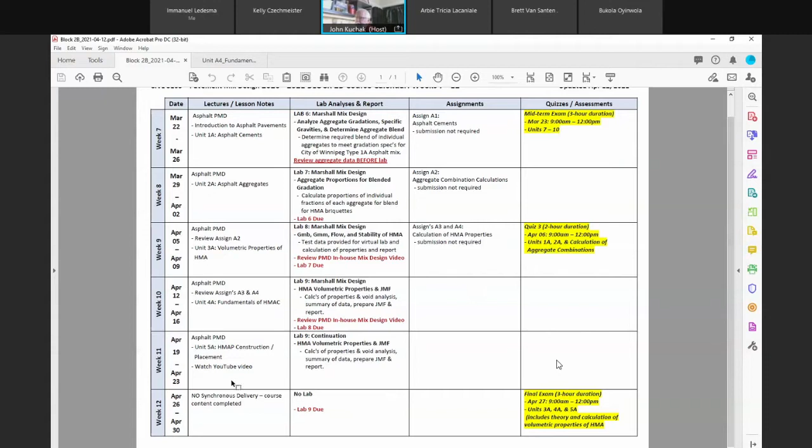In other words, what did we determine? I updated this. We're looking at units 3A, 4A, and 5A. There's also going to be calculations of volumetric properties of HMA. You'll have problems to calculate GSE, maybe GMB, GSB, percent asphalt absorbed, total. Those questions you see on the assignments are typical things. This is the latest version. I don't think I'll have to update it anymore, but if there are any changes, I'll let you know. That's coming up. Any questions on the block schedule?

Yeah, that's right, Pavel, sorry, just saw your message here. Yeah, you either multiply by 4 or divide by a quarter.

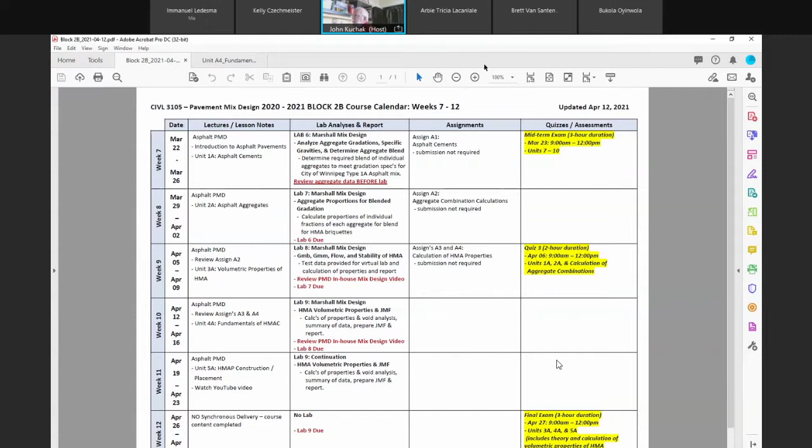Let me go to the next one here: fundamentals of hot mix. If you compare what we've been looking at, asphalt compared to Portland cement concrete, it's quite a bit different. I've always had a love for Portland cement concrete. Asphalt, I find it's okay, I don't mind it, but it's very temperamental, very sensitive to fluctuations and changes. We'll note that in the lab when we look at some of the properties we're going to be calculating, and specific gravities come into play. They have a big bearing on the outcome, your VMAs and your air voids. Asphalt is used worldwide, it's been around many, many years, and successfully too, but it's probably a little bit more finicky. Now when you're talking asphalts with recycled materials or polymer additives, it can get pretty hairy.

Okay, some of the key issues here we looked at: we know that it consists essentially of aggregates and asphalt cement.

Mix them together. Just like Portland cement concrete, the water gets absorbed by the aggregates. These aggregates in a hot mix are going to absorb some of the AC, asphalt cement. I use the acronym AC quite a bit, and you'll notice that even in the notes.

If we look at this mix here, you've got crushed aggregate, you've got the VMA with some AC, and if you look closer, you can see some small air voids, and that's what you want. This mix is going to be resistant to movement because it's sharp, it's angular, you've got your internal friction.

The rough texture gives good adhesion between the AC and the aggregate surfaces, so you should have high stability. Shouldn't have a problem with stability. Even with our mixes here in the city of Winnipeg, all the years I've been involved with it, stability has never really been an issue. There are other factors that come into play, like air voids and rutting and so forth.

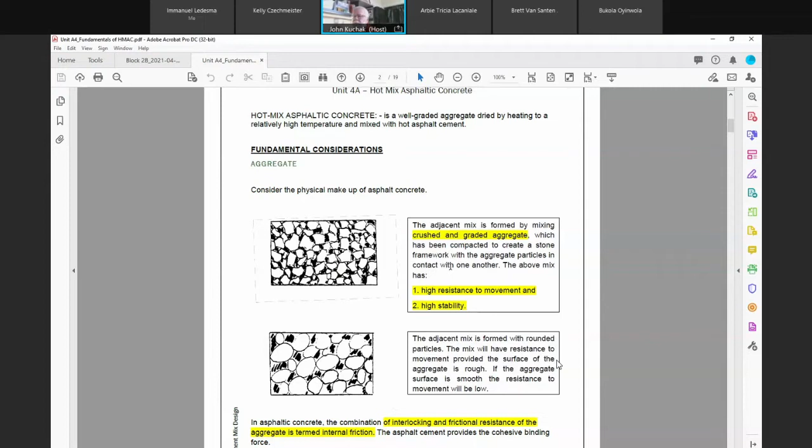If you look at the mix below it, it's a rough sketch, but it shows these aggregates are round. They're not sharp, angular ones. This is a smooth texture, and it may not adhere to the surface as well as it would in the upper sketch. The adjacent mix is formed of rounded particles, and they're going to move around.

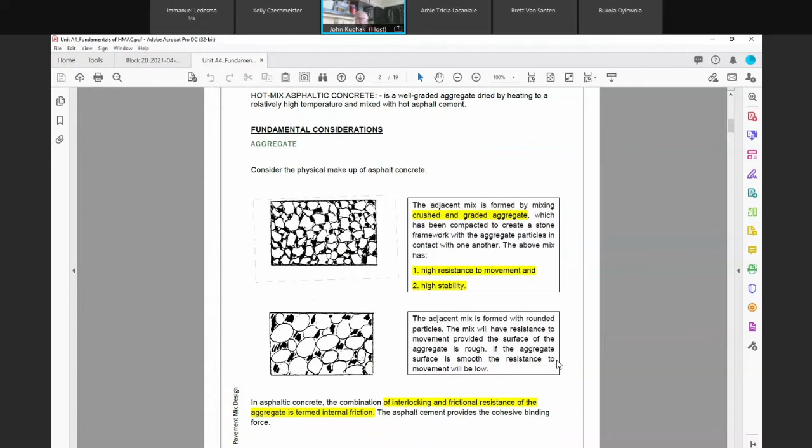The combination of interlocking and frictional resistance of the aggregate is termed internal friction. That's when we look at the mix and say, okay, what's internal friction like? We know that is key to the performance of the pavement, the hot mix.

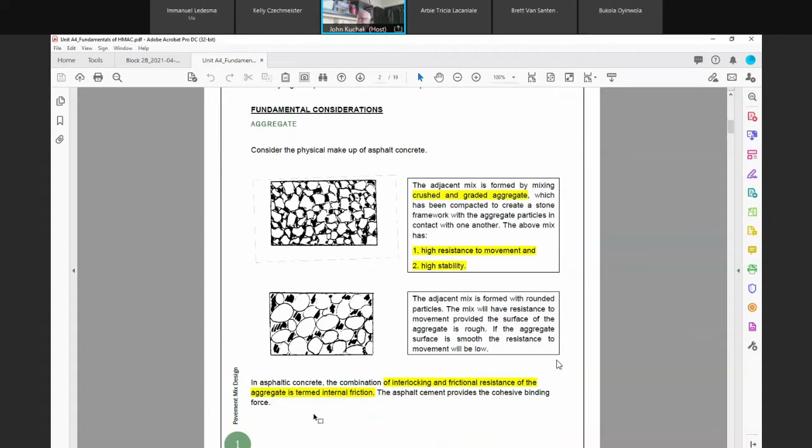We looked at this in your aggregates section, and this was part of your quiz, which I'm in the midst of trying to get finished off, marking.

In order of greatest stability: crushed particles, rough surface, that's your best. May not always be ideal, may not always be available. So rounded particles, rough surface - you're getting that adhesion, that film of AC is coating the aggregates. At least the rough texture is giving you some adherence.

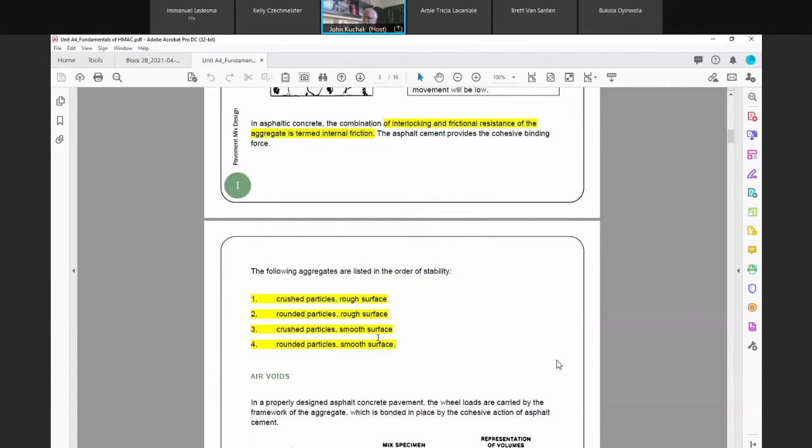Crushed particles, smooth surface - you may get the interlock somewhat, but now you're not going to get that adhesion of the film of AC to your aggregates, so you're not going to get that internal friction. And then the worst, obviously, would be rounded particles, smooth surface.

We looked at this earlier on, I just want to bring it up again. Aggregates, voids, VMA - voids in mineral aggregate. Add some AC to it, and you're going to get air voids. You're going to get asphalt. This is total, and then you've got your aggregate. Keep in mind that some of this asphalt, if you look at our sketch, goes into the aggregate, and that's the absorbed portion.

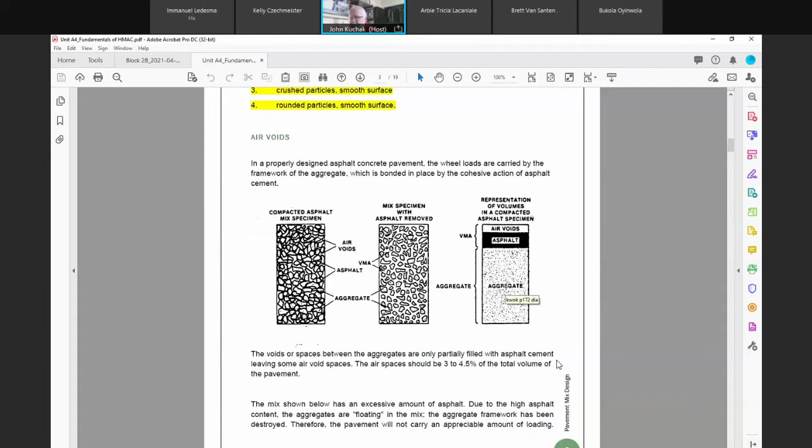We're shooting for air voids, essentially 3 to 5%. It doesn't mean you're going to get 3 to 5% in the field. When you first make a mix and you put it in the field and pave it, you're probably around 8% air voids in situ. With time and traffic and further compaction, you're going to consolidate. It's been proven that from a design point of view, between 3 and 5, you will have the air voids that are required in the field.

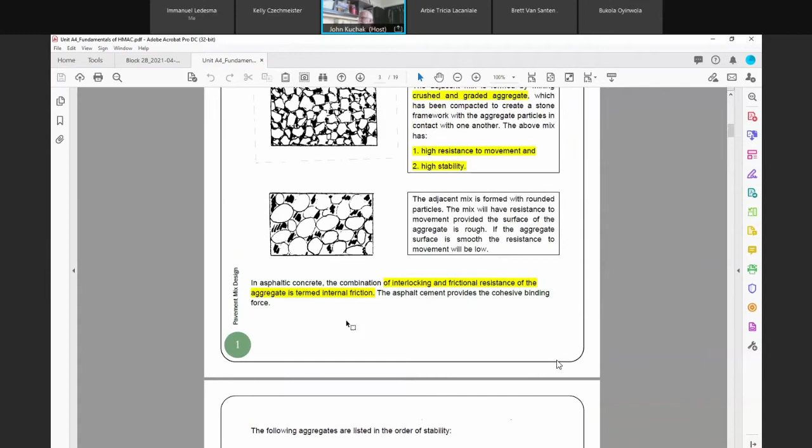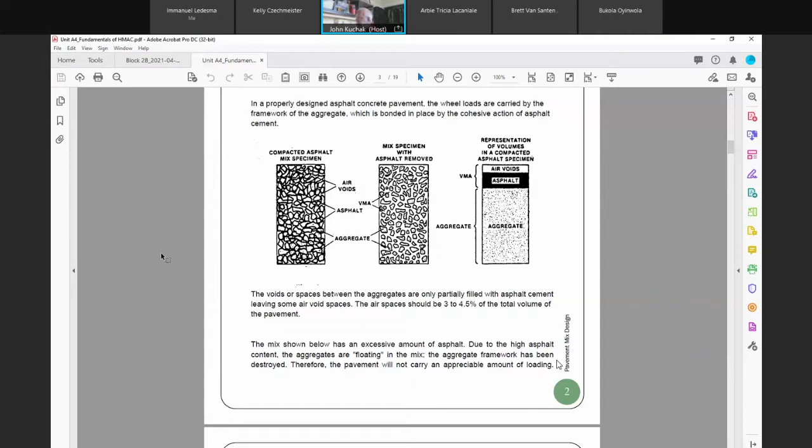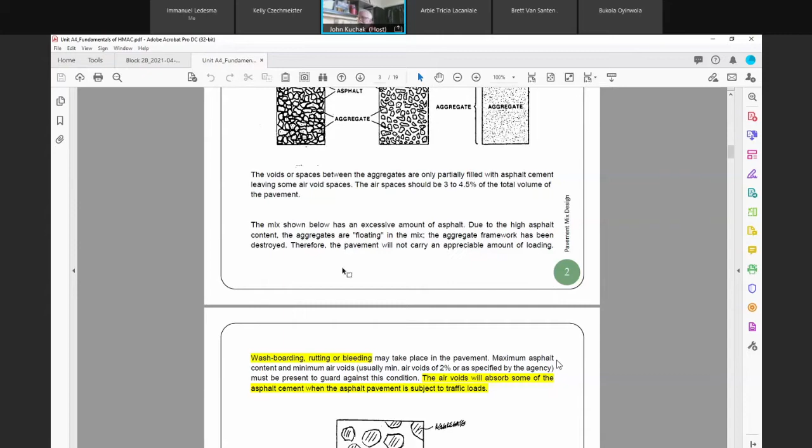So if we look at a couple of mixes, what can happen? Looking at this rough sketch, the mix shown below has an excessive amount of asphalt. Due to the high AC content, the aggregates are floating in the mix, and the aggregate framework has been destroyed. In other words, if you add too much AC, it's going to push those particles apart.

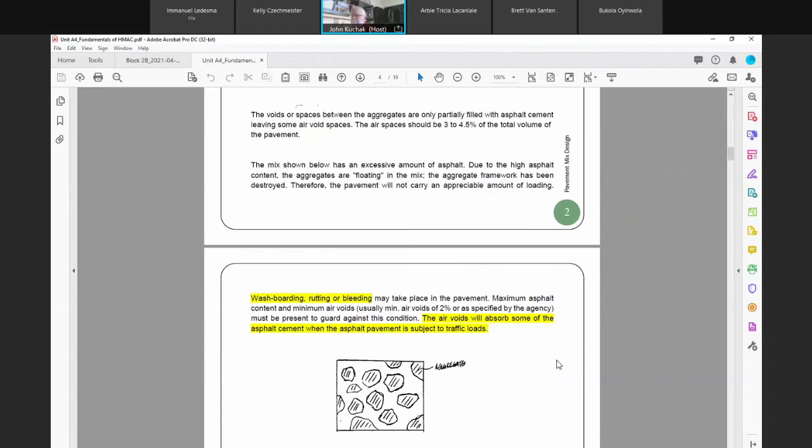It's almost similar to Proctor testing. You did standard Proctor last year with Natalie. If you add water past the optimum, it starts to decrease the density because it's pushing the particles away, whereas when you're first reaching the optimum, it's helping to lubricate and draw the particles together when compacting. AC is the same way, hot mix is the same way. You want to find an optimum AC content that gives you the best mix.

So if you have too much, you'll have bleeding. You may have seen that - sometimes when you drive down the highway, you look ahead and see kind of a glossy patch coming up. That's excessive amounts of AC, or a loss of air voids where the AC bled. Washboarding, rutting, or bleeding may take place in the pavement.

Maximum AC and minimum air voids of 2%, and you got to have a minimum. Many times, some of you that may work with MI or other contractors, if you got a 2-lift or 3-lift construction and your air voids, your VMAs are borderline, you can put them in the bottom mat, because you're going to have another mat on top of it, another mat on top of it.

Typically here we basically have 2 lifts, but I've been on a project where we had 4 lifts. If you're using sand asphalt, you need a thicker layer. The highway between Winkler and Morden, that was almost an essential sand mix, and that was about 180 to 200 millimeters thick pavement, asphaltic.

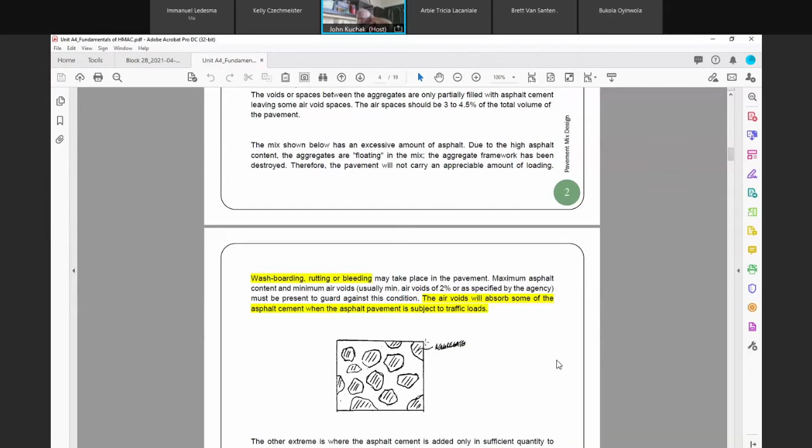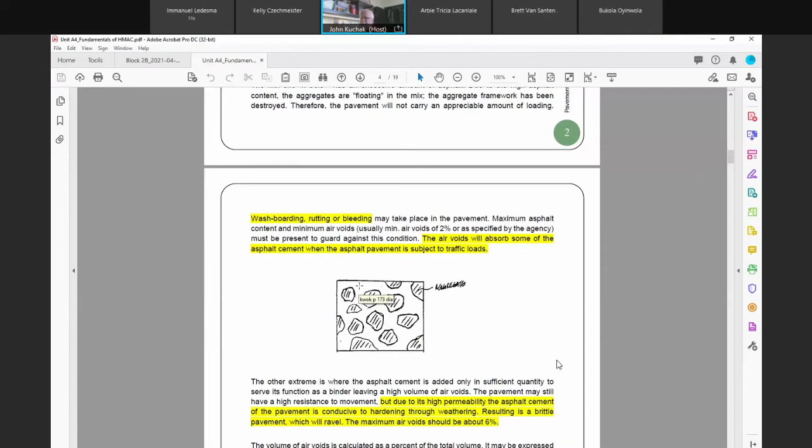So again, you can just see it's key - too much is no good, not enough is no good. The air voids will absorb some of the asphalt cement when the asphalt pavement is subject to traffic loads. That's why we want the air voids - you gotta have the movement. It's flexible, so as you're loading those pavements, the air voids allow movement to a certain degree. That's why we have to be careful on those air voids.

The other extreme is where the asphalt cement is added only in sufficient quantity to serve as a binder, and that means you got excessive air voids - you don't have enough AC. The voids in mineral aggregates are there based on the aggregates, and if you don't have enough AC, some of it's going to get absorbed. The effective AC now isn't enough, so now you got extreme volume of air voids - high permeability, conducive to hardening through weathering, oxidation. Brittle pavement mix, there's no flexibility - it's too stiff, it's brittle.

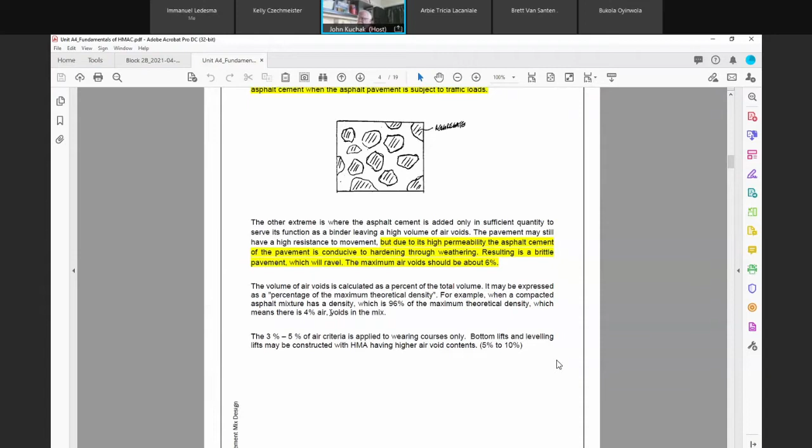So the maximum should be about 6%. The volume of air void is calculated as a percent of the total volume. It may be expressed as a percentage of the maximum theoretical density.

So that 3 to 5% criteria is what's been proven in the industry to work. That's where we have to be if we're going to have a successful mix. The density you do after compaction - those of you that maybe have done density testing, whether on granular base using nuclear densometers, or even on the pavement - typically you're going to do a percent compaction, and you may do compaction based on the GMM, the maximum theoretical specific gravity, which usually isn't done here.

It's usually based on the Marshall density. Just like a Proctor - you do a Proctor on the A base, you test the density in the field, and the density in the field is what percent of the standard Proctor. Same thing here: you compact a hot mix, you do densities on it, either by the nuclear gauge or you take cores, and then you determine what is it based on the stability of that mix.

In other words, you take an asphalt sample, you run stabilities - you hollowed out the briquettes, you do your bulk specific gravities, you run stabilities, you run flow. Now, everything in the field that was compacted is at what percent of that Marshall density?

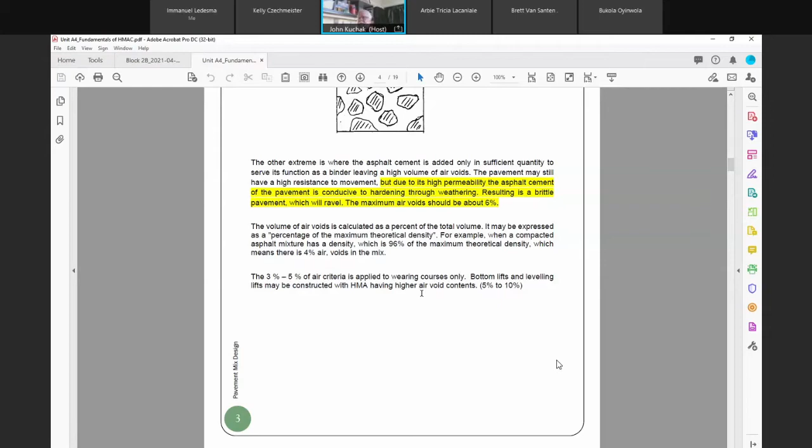Different agencies use different criteria - I believe AMI calls for 97 or 98% of Marshall density, though it's been a while since I've read that spec. The 3 to 5% air criteria is applied to wearing courses only. So down on the bottom, you can have higher air, but the surface one, where you have a lot of resistance to traffic, that's where you want 3 to 5.

What is VMA? It represents the space available to accommodate the volume of effective AC. Effective, because when you add total asphalt, you lose some of it into the aggregate - it's absorbed. So the remaining is the effective amount. The voids filled with AC is your effective asphalt content. Same thing applies to VBE, the volume of effective bitumen - it's also the voids filled with asphalt. Makes sense, right?

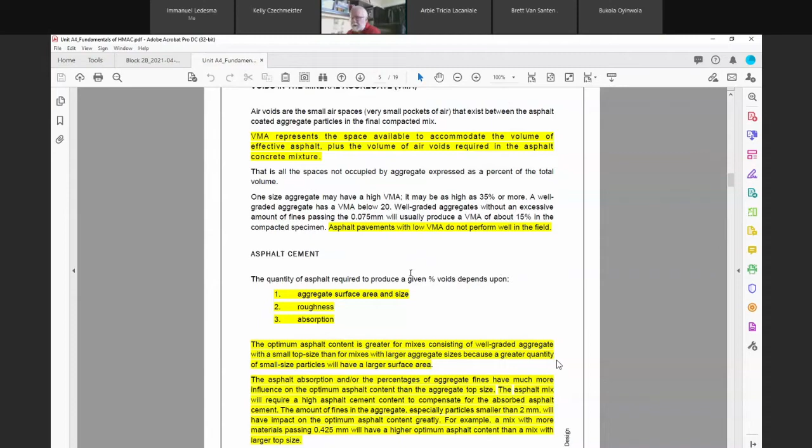Asphalt pavements with low VMA do not perform well in the field. So it's critical - you've got to have that optimum void and mineral aggregate. That's a starting point. Questions so far?

We've been talking voids, voids, voids. What are they dependent on? These three things: the surface area and size of your aggregate, the roughness, and obviously its absorption. If you have high absorptive aggregates and you haven't designed it properly and your AC content is low, you're going to lose a lot of it into the aggregates and you're not going to have your effective AC content.

So it's key - a couple things to remember here. Again, it's based on surface area. Optimum AC content is greater for mixes containing well-graded aggregate with small top size. Maximum size is smaller, meaning your grading is finer. A greater quantity of small size particles will have a larger surface area than larger aggregate - sand has more surface area than gravel and coarse aggregate. That's why in Portland cement concrete, if you have a very sandy mix, you need more water to make it workable, because you need more cement due to the greater surface area.

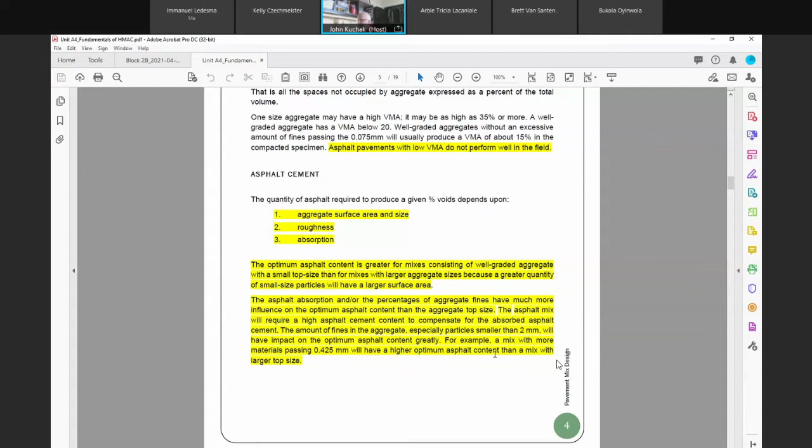The asphalt absorption and/or the percentage of aggregate fines have much more influence on the optimum AC than the aggregate top size. The mix will require a high AC to compensate for the absorbed asphalt cement - due to surface area, greater absorption. The amount of fines in the aggregate, especially smaller than 2 millimeters, will impact your optimum AC content. In other words, a mix with more material passing 425 will have a higher optimum AC than a mix with a larger top size - you just need to reread that a few times to get it straight in your head.

I made it yellow for a reason. There's a lot of information coming up here, and again this comes with experience. I'm going to just highlight some key issues - I don't expect you to know it all. It takes a good understanding of asphalt technology to work with this, but some of it is pretty straightforward.

We've had properties we're trying to achieve: VMAs, air voids, stability. Again, stability is the resistance to movement - how strong is that pavement, how flexible is it? You may have high stabilities.

I believe we need 7,000 newtons, City of Winnipeg. You may be at 10, 11 - is that a good mix? May not be, maybe it's too high, not flexible enough, too brittle possibly. So there's a rhyme or reason why we select certain criteria.

So if you have low stability, what are some of the causes? Well, too much asphalt - that's why we've got to get that optimum. Remember, we're looking for well-graded mixes. Maybe you've got too much sand in there, the medium-sized sand.

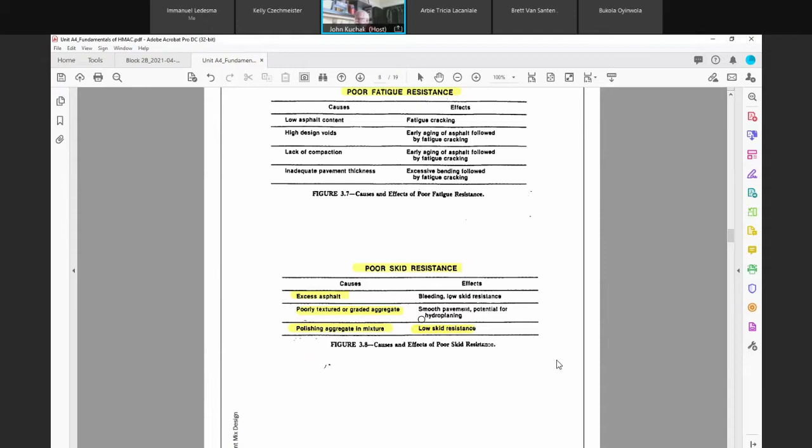And rounded aggregates, they're polished. It's going to give us poor skid resistance. Poorly textured or graded aggregate, polishing aggregate - essentially the same thing. If it's poorly textured, chances are it's polishing. So here, in the mixture, we're going to have low skid resistance. Here, though, on wet conditions, you're prone to hydroplaning. Okay, any questions so far?

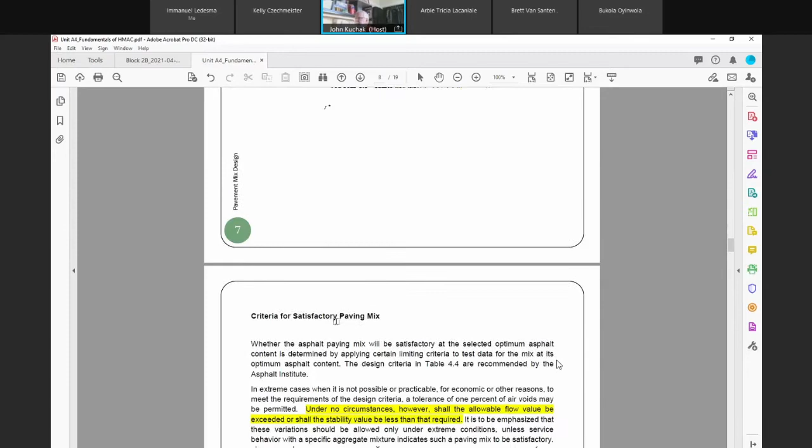I'm going through this fairly quickly since some of this was covered in our aggregates section, but these are criteria for a satisfactory paving mix. Here's some Marshall design criteria taken out of Asphalt Institute, and you'll see this quite a bit in all other agencies.

Look at light traffic - when you're designing a pavement, the thickness is going to be dependent on the magnitude of traffic and the frequency. We covered that in Unit 1 with Portland cement concrete - it's the magnitude of those loads and also the frequency. They refer to that by counting the number of equivalent single axle loads. If we do pavement thickness design, you would cover that.

So you're looking at light traffic, medium traffic, and heavy traffic. City of Winnipeg is in the heavy traffic category because we have arterial roads, residential roads, but we also have roads like Main Street and Portage. The bigger arterial roads will take a lot more heavy truck traffic.

So here we go with 75 blows of compaction. In the video, you drop the hammer, 75 blows on one face, pull out the mold, flip it over, pack 75 on the other side. So we're using a lot more energy, and if we're using more energy, our densities are going to be greater.

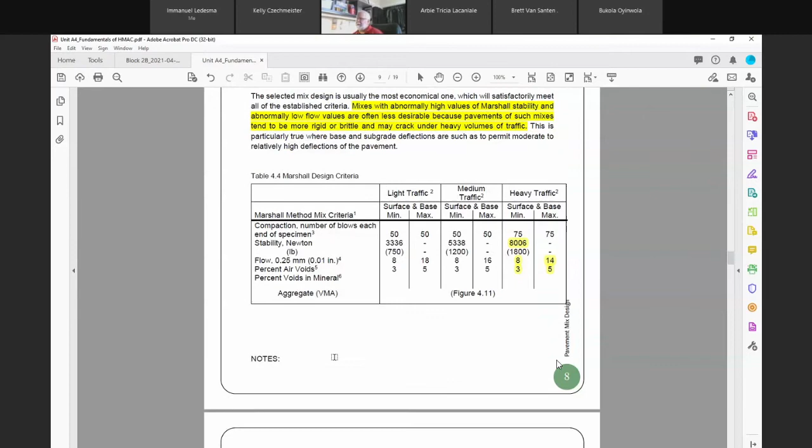So you can see here that our VMA changes somewhat - they just put a footnote for the VMA, which is going to be dependent on your maximum size. If you look at number 6 here, percent voids in mineral aggregate will be calculated on the basis of the bulk specific gravity of the aggregate. So it's a function of the aggregate.

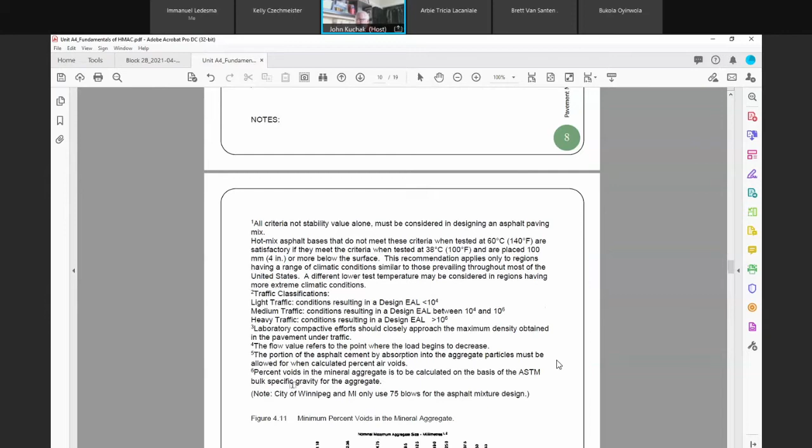But anyhow, you can see there's different criteria based on your traffic loading - light traffic, medium, and you have a range, 75, 75, and so forth, okay?

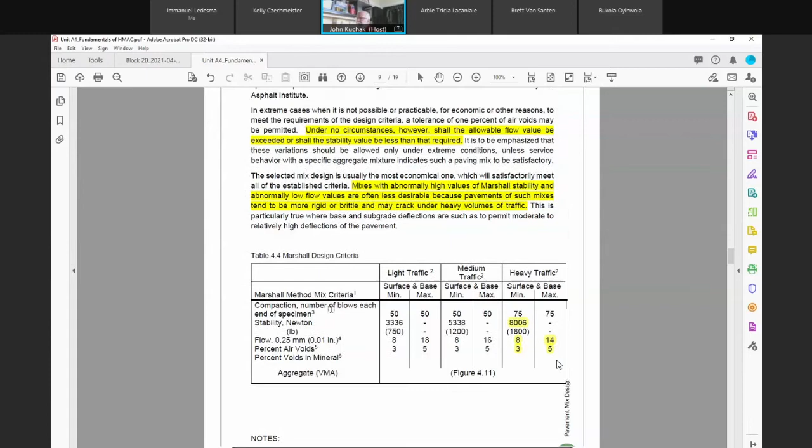Under no circumstances shall the allowable flow value be exceeded, or shall the stability value be less than that required. What they're mentioning here is economics comes into play, and sometimes it may be cheaper. But if you're making a cheaper mix and sacrificing your flow and stability - high flows are not good because you're going to have too much deformation. Low flows are no good because your pavement's too brittle, it's not flexible enough. So you've got to have a happy medium.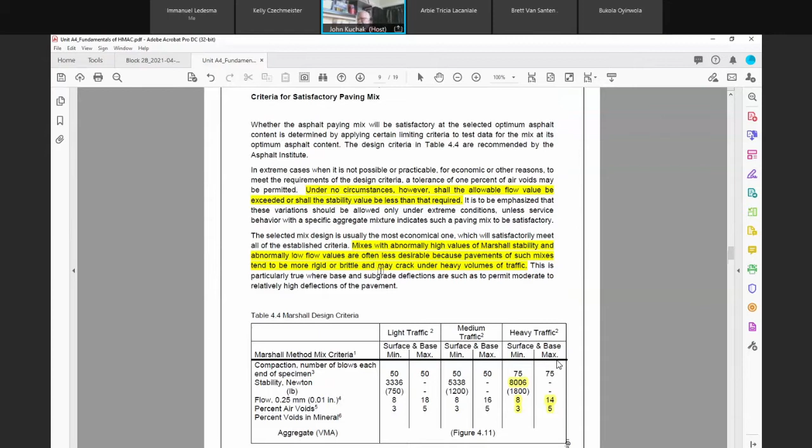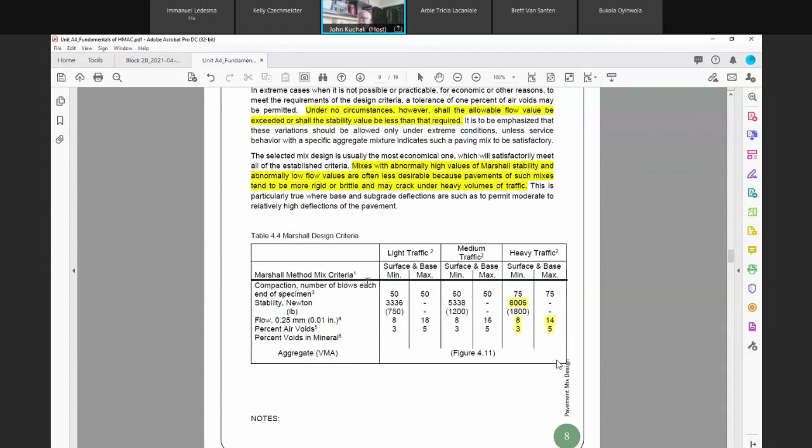Mixes with abnormally high values of Marshall stability and abnormally low flow values are often less desirable because pavements of such mixes tend to be more rigid or brittle and may crack under heavy volumes of traffic. We know if something is very, very brittle, there's no ductility to it - it can't bend. Stress strain - you have a material where your load may be low, but your strain may be high, so there's more flexibility. A weak silt, for example, if you did an unconfined compression strength test, you have low loading but phenomenal strains.

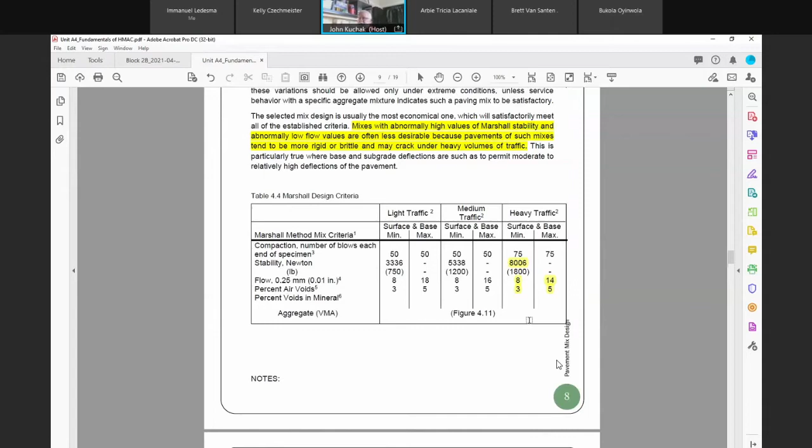So this was taken out of Asphalt Institute, and this just gives you the minimum percent voids in mineral aggregate. But that should have been down in the next one - here's the typical one we're looking at.

Okay, this is essentially what's happening in a hot mix. You've got aggregate, you've got absorbed portion, and this is your effective. In other words, your VMA is from there to there. You've got air voids, here's your voids filled with asphalt, which is your effective. VBE, volume of effective bitumen, is equal to the volume of voids filled with asphalt. Straightforward - we have an effective volume of aggregates, and that's this one here.

That's this one without the aggregate that contains the asphalt - in other words, the voids containing the asphalt. Here's your total AC, it's made up of voids filled with asphalt and what got absorbed. Sorry, what got absorbed here, this way.

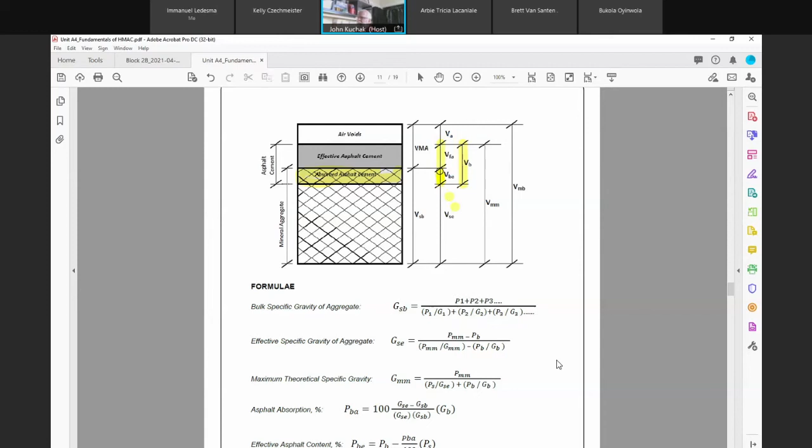Here's your maximum density, specific gravity, VMM - you can see there's no air voids. Add the air voids to it and you get your bulk. Knowing these specific gravities, you can determine volumes. Given a mass, you can determine - we went over that on the volumetric calculation PowerPoint, but I believe it's a PDF copy for you guys. Formulas are given on the bottom here, straightforward.

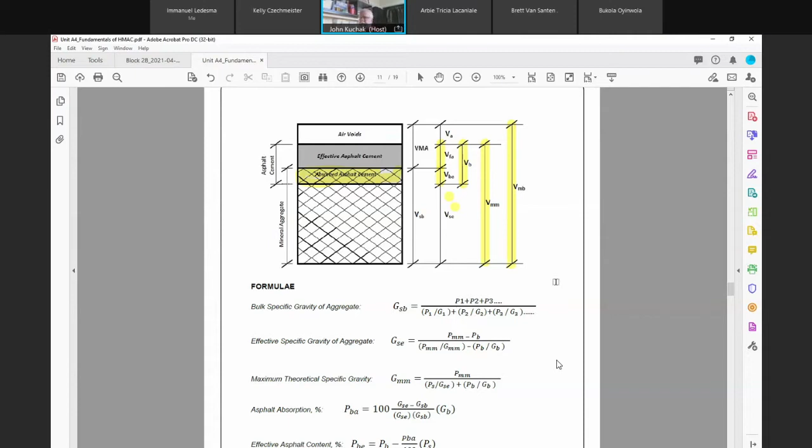Keep in mind, some of you that have done that assignment - there's one problem where you have to calculate GSE, you have to calculate GMM. You're saying, if I look at my formula here for effective specific gravity, I have to know my GMM. So you say, well, I'm going to calculate my GMM, but I've got to know my GSE. Now what do I do? Look at all the other formulas - it'll come.

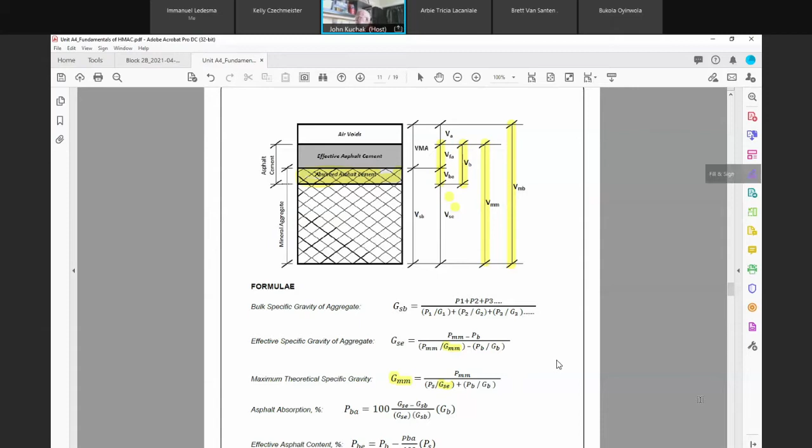If you know the absorption, and you know the bulk specific gravity of the aggregate, and the specific gravity of the AC or the bitumen, you can calculate GSE. Plug it in here and calculate GMM, then you go back here.

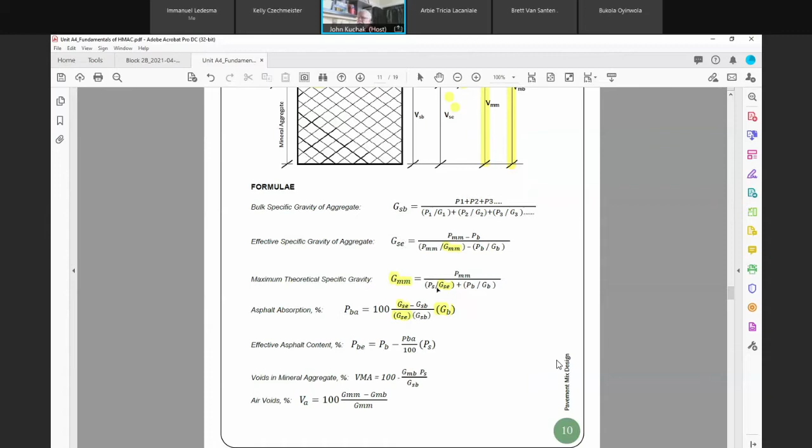So these are the formulas given to you. Now, I've uploaded a PDF copy on the Marshall Mix Design. It's a PowerPoint slide, I believe it's in PDF format.

It gives you essentially the step-by-step procedure that we would have been doing physically had we had face-to-face labs. I'm going to go over some key issues here to mention the requirements that lead you up to it. We got to select the aggregate gradation, we've done that, and we have to determine the optimum AC. That's essentially what we're trying to do.

We've got aggregate, we got to find the optimum blend, and then we got to find the optimum AC to mix with that aggregate to give us the physical properties we're looking at. There were many methods done - the Hubbard, the Marshall, the Hveem, surface area. This is the one that's now widely used all over the place, except here in Manitoba. Essentially, we've always been doing the Marshall.

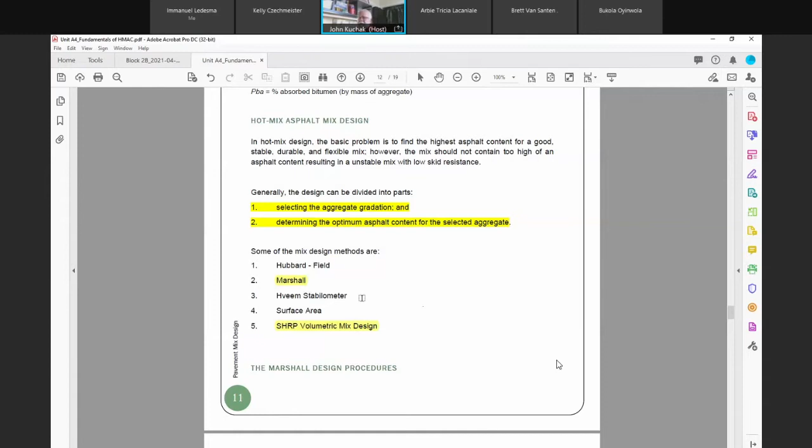Bruce Marshall, who was an engineer way back, I think in the 30s with the Mississippi Department of Highways, came up with the whole concept of Marshall Mix Designs. Hence the name Marshall Mix Design, after Bruce Marshall.

I think in the video that Ray put together, he had shown you the viscosity temperature viscosity chart. These charts are required to determine at what temperature do I mix my mix. I gotta heat my AC, I gotta heat my aggregate, I gotta blend them, I gotta mix it at a certain temperature. What temperature is it? Well, it's a function of your asphalt cement, the AC.

And then I gotta have a certain temperature to compact it. If it's too cold, I won't get my density. If it's too hot, I'll get higher densities and I'll suffer on my air voids. So there's an optimum. So what they do is they run viscosity tests.

And there's criteria that they select for the viscosity, and they join the two lines together. So when you have a chart, the mixing and compacting temperatures are determined from the temperature viscosity chart. The temperatures required to produce viscosities of 170 plus or minus 20 centistokes, and 280 plus or minus 30 centistokes for compacting. Don't worry, you don't have to know those things. I just want you to understand how we get these temperatures - we get them from a temperature viscosity chart.

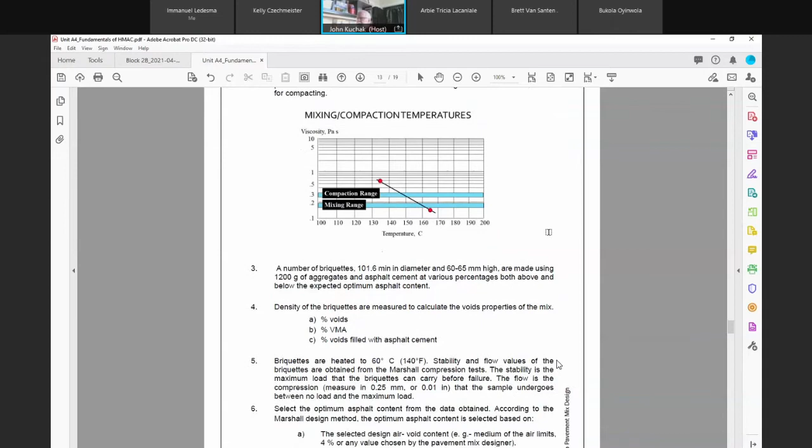So you would run - and these charts are usually provided, or they should always be provided, by your AC supplier, whether it's Husky, Esso, or Petro-Canada still in there. Anyhow, this is what we use to compact those briquettes. And we compact briquettes, and the density of the briquettes are measured to calculate the voids. So these briquettes, we can do percent voids, percent VMA, and percent voids filled with asphalt, which is just a function of the VMA. So those briquettes give us enough information.

From those briquettes, to get percent voids, to get VMA, to get voids filled with AC, we have to determine its bulk density - weight in air, weight in water. Straightforward, no different than aggregate, no different than the AC when you're doing your GMM, except you're doing it in a container.

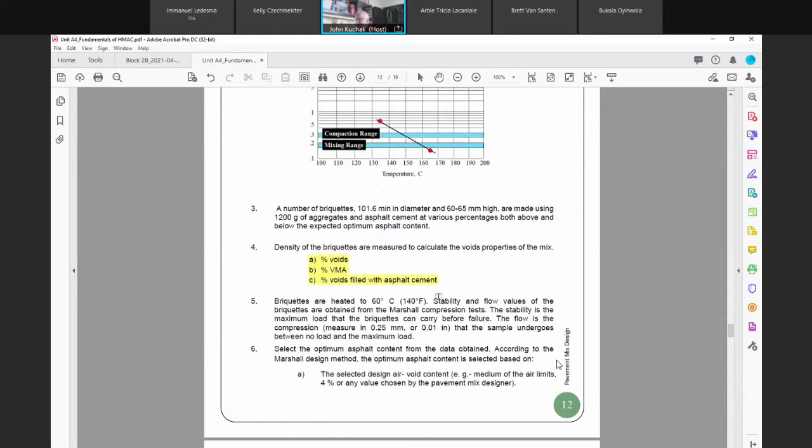But these voids, it's the same thing. You would put it in a basket. Mass of water is your volume, water displacement. It tells you how to do it. Briquettes, that's straightforward, I'm not going to go through it - that's a lab procedure.

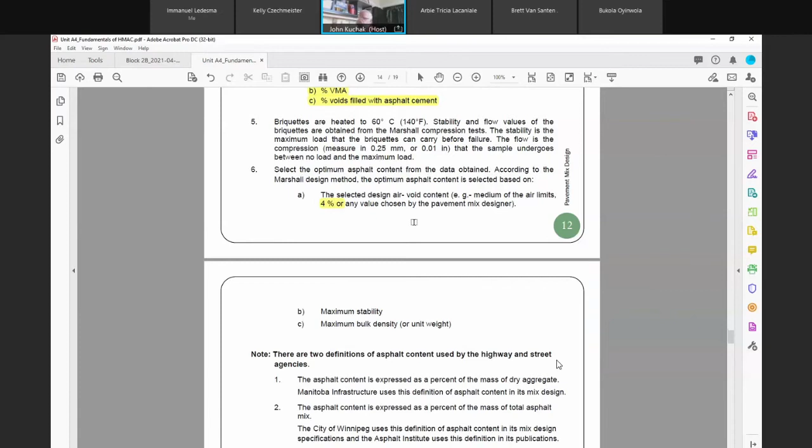Select the optimum - and this is going to come up again in the lab. Remember we said the selected design air void is essentially the medium of the air void range. So we're 3 to 5, so we're looking at 4%, or any chosen - you may be with a different agency, different mix, whatever. You typically look at the maximum stability and the bulk density. But the key governing one is 4%, because your maximum stability does have a spec range on it.

So you want to make sure that you also have, you're within that maximum stability, you're below it.

Density is going to be a function of the mix, so there's no criteria really for density. So AC, you select 4%. What's my AC at 4% air voids? And you start from there.

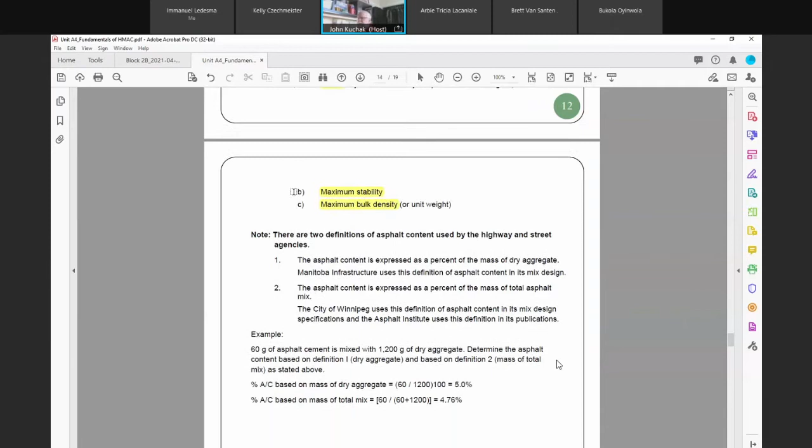When you're producing asphalt, you can look at the AC content as percent of total mix, which is what the city of Winnipeg does, and the Asphalt Institute, and a lot of agencies do. Highways design AC content as percent of aggregate, almost like moisture content. For example, if you had 1,200 grams of aggregate and 60 grams of AC blended to it, based on mass of dry aggregate, you've got an AC content of 5%. But if you do it by mass of total mix, it's 4.76%. They're both acceptable as long as you know how it's been designed.

So when you're calibrating a plant, you've got to calibrate your AC based on total mix or total aggregate, whatever the case may be. It's got to always be specified as to what the design is. So it just goes to show you, you're out about 0.25% just from looking at it differently.

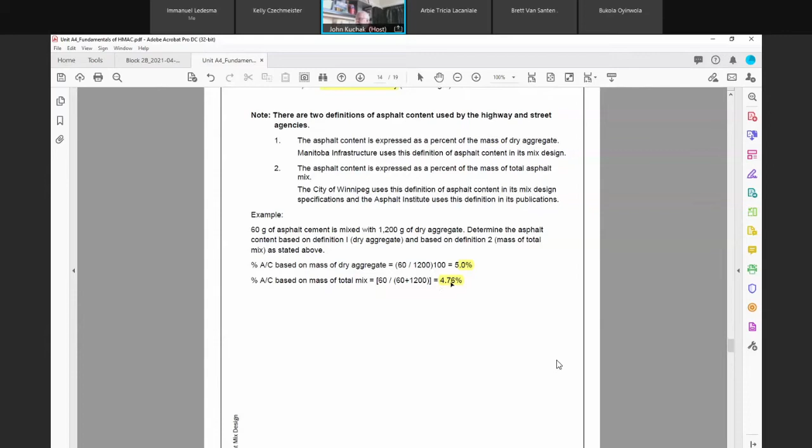In the real world, you might say, okay, my AC optimum from past experience is about 5%, 5.2, 5.25. So I'm going to do 4.5, 5, and 5.5. In other words, you want to be on both sides of optimum, just like when you're doing a Proctor test. The more you have, the better off your curve, because sometimes your data isn't good.

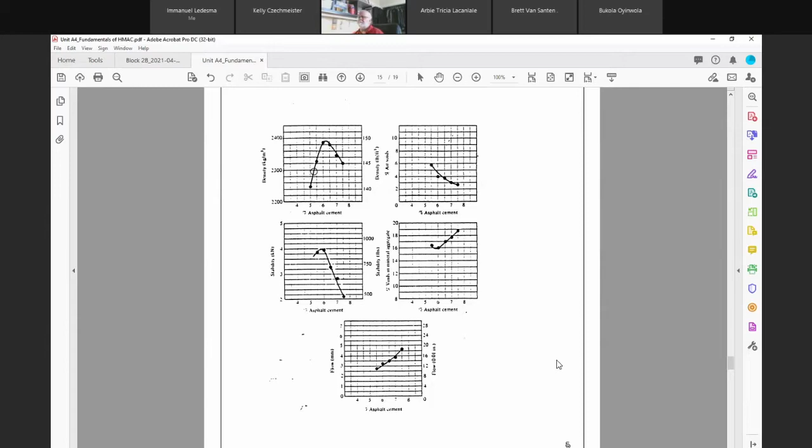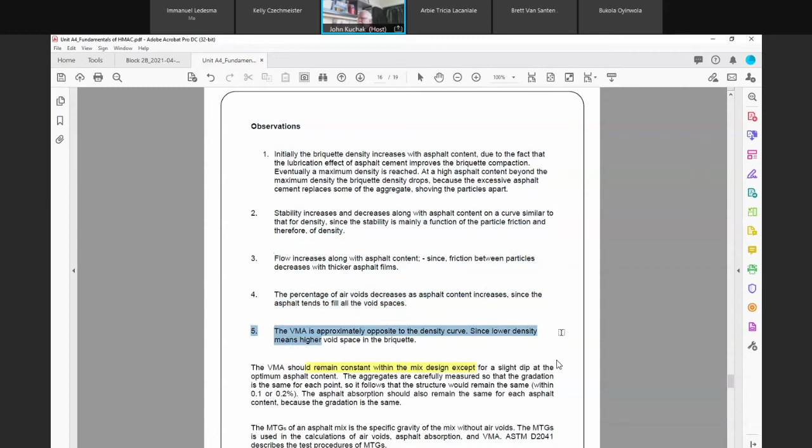These are some things to consider, and I've actually elaborated in Lab 9. I've got the job mix report requirements, there's this section here. These have been all elaborated a bit more. Okay, so I'll look at that later.

The VMA should remain constant within the mix design, except for a slight dip at the optimum AC content. The aggregates are carefully measured so that the gradation is the same for each point, so it follows that the structure would remain the same within 0.1, 0.2%. The asphalt absorption should also remain the same for each AC because the gradation is the same. Makes sense - if you've got your aggregate consistent, the gradation's consistent, the batching is consistent, aggregate absorption is aggregate absorption. It should be the same, doesn't matter whether you're adding 4% AC to it or 5% or 6%. The absorption as a percent is going to be the same.

Aggregates are aggregates. Now, if your aggregates vary, and this is what we're going to look at later in the lab, specific gravities of aggregate are very important when it comes to void calculations. You can have two blended aggregates with the same gradation, but their specific gravities can be different.

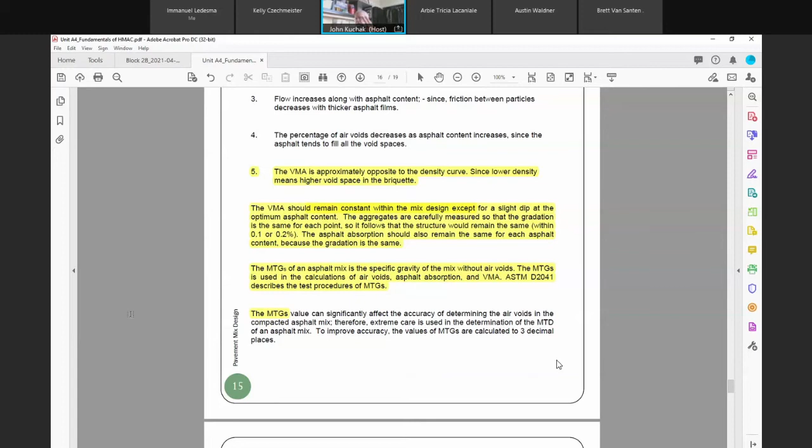I just want to stress that specific gravities are key for calculating your voids, even though gradations may be the same. Gradations will give you your compaction capabilities, your friction, your internal structure.

The maximum theoretical specific gravity of a mix is the specific gravity of the mix without air voids. It's used in calculating air voids, asphalt absorption, and VMA. This value can significantly affect the accuracy of determining air voids in the compacted mix, so extreme care must be used in determining maximum theoretical density or specific gravity.

That's why we calculate to 3 decimal places—rounding to 2 can affect the results. So when looking at specific gravities for aggregates, for the bulk specific gravity of a mix, or for the maximum theoretical specific gravity of the mix, take it to 3 decimal places, 4 significant figures. Not 3, not 2, because otherwise your void calculations will be off.

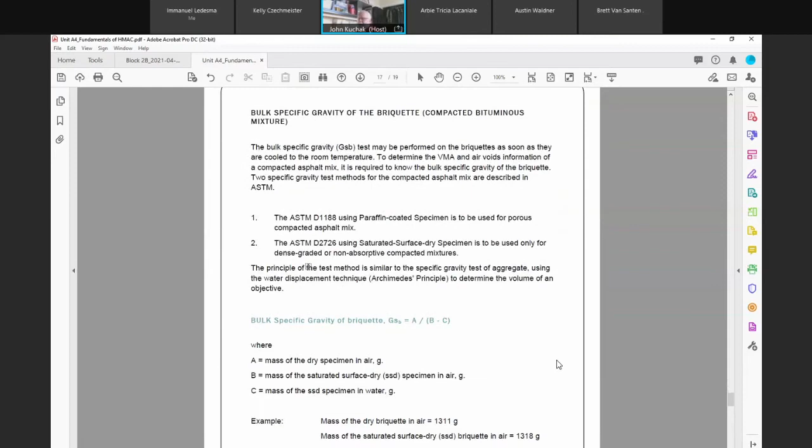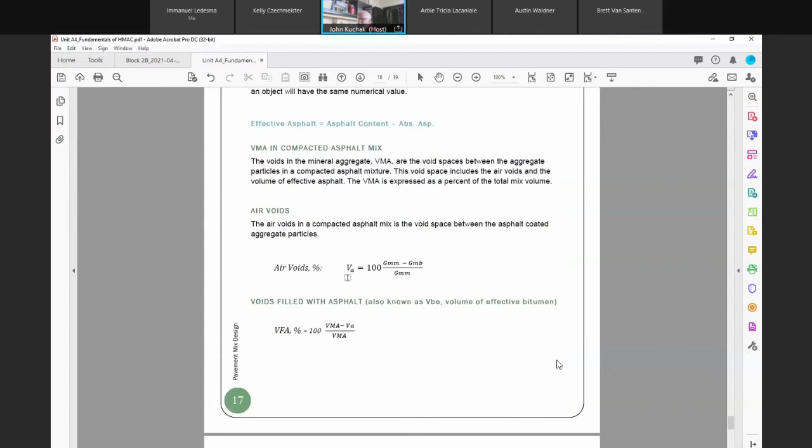This is the procedure for doing the bulk specific gravity, which we've covered in other labs. This gives you the definition of asphalt absorption—just reinforcement of our formulas. You have these formulas on the formula sheet.

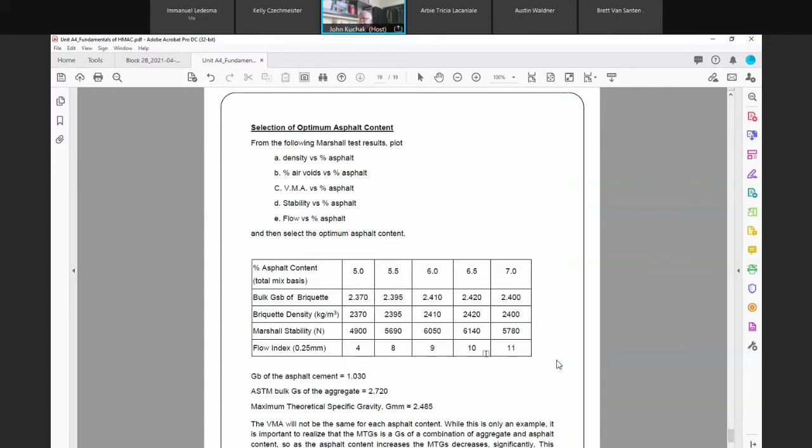Here's an example, but we'll look at this more in our lab. Essentially you have 5 AC contents here, and you calculate the briquettes, the density, the stability, and the flow, then plot them on those graphs. Anyhow, let's leave it here—that's just the fundamentals.

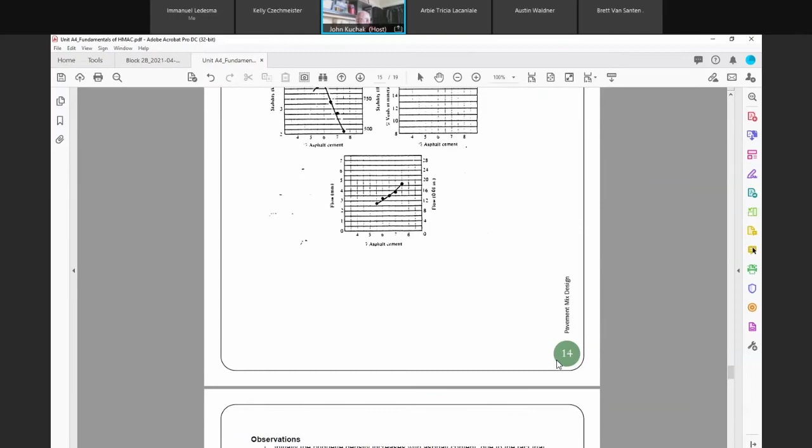There's a fair amount of information to know here. The importance is poor skid resistance, poor fatigue resistance—I'm not going to worry too much about the causes, but these are some of the problems with the mix. There's usually a cause and effect: poor skid resistance, poor fatigue resistance, poor workability—that's important.

Permeability, durability, low stability, okay. I'm not going to give you a lot of questions on them, but I may give you a true or false, or ask for causes—give me two causes for low stability.

Keep in mind we're covering the next unit, which is construction, placement and procedures, and compaction. With 3 hours I can't cover too much, but I definitely want to cover the properties and calculation of the volumetrics. You might have 2 or 3 questions on that. Let's take a little bit of a break here.

No, Pavel, they're not linear trend lines—we'll discuss that in the labs. There's a slight curvature for most of them, so I usually use the polynomial curvature. They're not linear, especially with graphs on stability or density curves. AC sometimes looks linear, but there's a slight curve to it, from the upper left-hand corner curving down and to the right, bottom right.

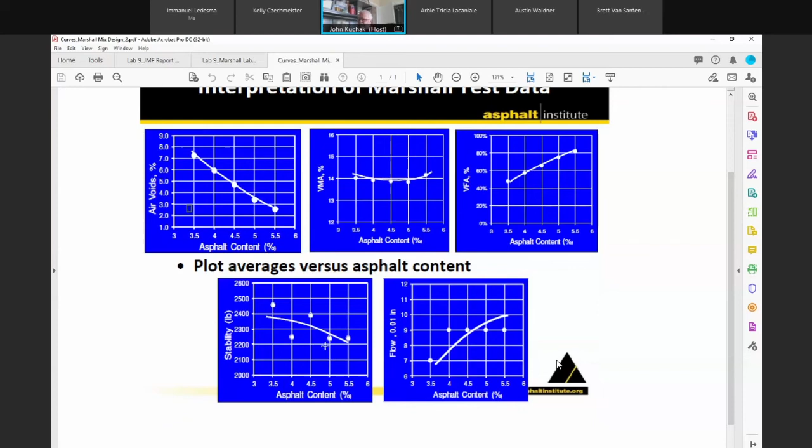So these give you an idea what the curves look like. There was another one I loaded up on Learn. So stability values increase as AC content goes up to a maximum, then decreases.

Flow value consistently increases with increasing AC content. Density curve of total mix follows a trend similar to stability, except that the maximum density, normally but not always, occurs at a slightly higher AC.

Percent air voids steadily decrease with increase in AC content. Percent VMA generally decreases due to better compaction to a minimum value, then increases with increasing AC content because the aggregates are starting to be pushed apart by excess AC. And the percent voids filled with asphalt steadily increases with increasing AC content because the more of the VMAs are being filled with the AC, which will give you lower air voids. So the VFA increases.

The data points at times may be such that the typical shape of the curve for a specific property may not be ideal. However, plot all your data points, do not remove them. You plot them as you see them, and then plot a best fit line, trend line.

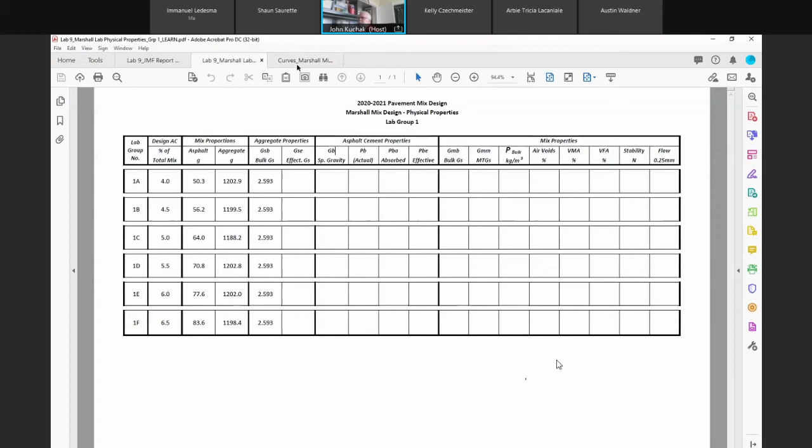Brings me to, stop sharing this one. I have an Excel spreadsheet here I want to use.

Quit taking pictures, guys. Calculate that on your own, because maybe I'm pulling your leg and maybe they're wrong. Calculate them, don't take me as being correct, because I'm not correct that often.

Now you would go through all these calculations. You might have the formulas in there. For example, you may have AC and then you just copy those formulas.

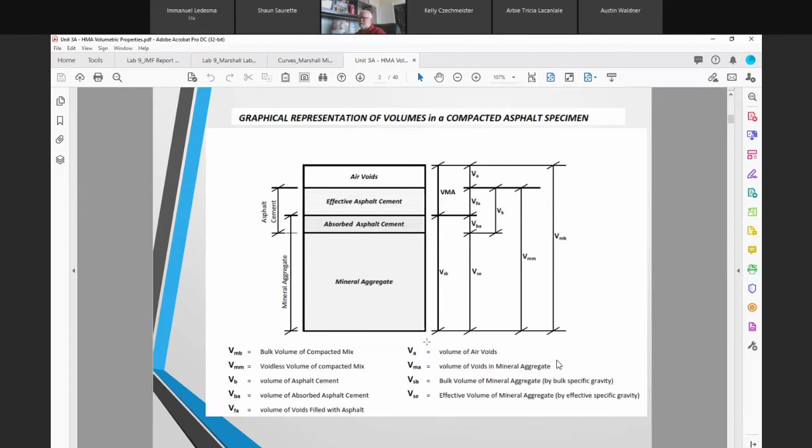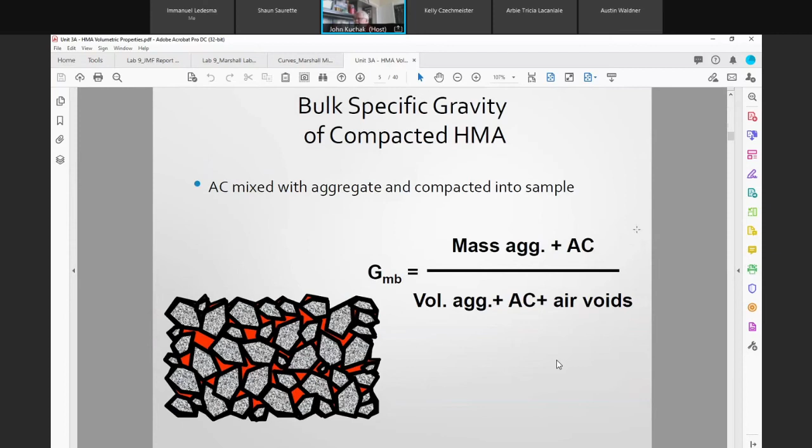Okay, remember this was in blue. This is just a different version of it. There's the bulk specific gravity of a compacted mix, GMB, remember? It's the mass of the mix divided by the volume of the mix, but also includes the air voids.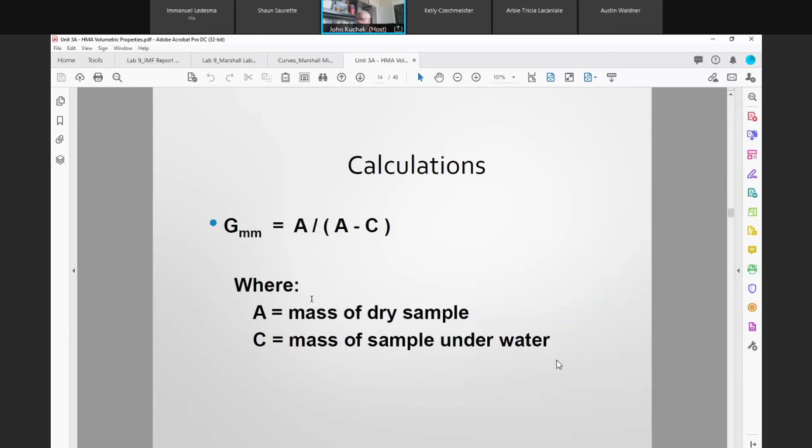There it is, mass of dry sample. This would, if you were physically doing it in the lab, you would weigh in air and weigh in water. Okay, but there it is there. We know the mass of the aggregate.

When I was in industry, we would sometimes just run a specific gravity. You don't have to run a maximum theoretical specific gravity on every AC content. It's not going to change.

You do it typically close to optimum, so say around 5%, you would take a 5% and run this GMM on it. Aggregates are the same, absorptions are the same. So really your specific gravity GMM should be the same, whether it's 4%, 5%, 6%, whatever.

So in industry we didn't always run it, we would just calculate it this way. Why not? It's doable. Okay, so this is where it comes into play, we're understanding the technology behind the mix designs. And then granted, it takes time if you've never been involved with it.

So when we found out from the various groups, some of them had negatives because of their GMM. Some GMMs worked out, it depends - depends if you had higher AC content, it may have absorbed quicker, whatever. But I would then have the students calculate their specific gravity GMM manually this way, if you want to call it manual.

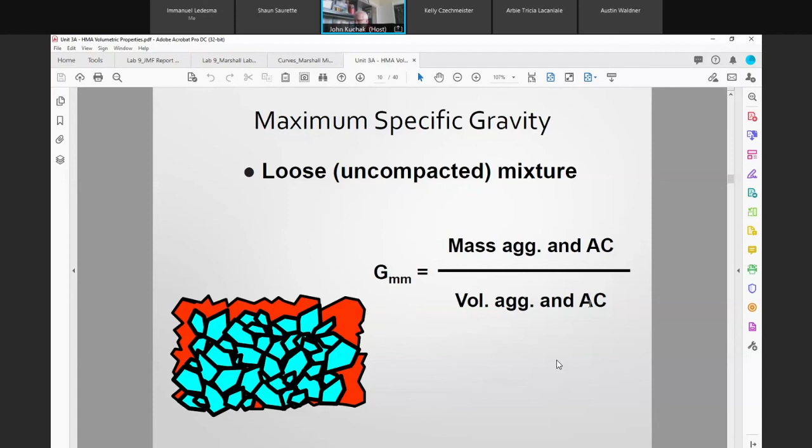Okay, just go back now to the Excel. Okay, so they would calculate this manually, and once you had it, then you could calculate the GSE.

Any questions? Because here you can see that the effective specific gravity of the aggregates is dependent on L8, which here is your GMM. So we would physically determine these by the formula we just looked at.

So what I'm going to do is, because these values are somewhat low, I will put up another spreadsheet. We'll have these. Okay, that's already given, I'll give you 1.028 so we're all using the same one. And I will give you this, and this.

Stability and flow, I will give you that also, because you're now not dependent on the other group's data. Now each group is responsible for calculating all these physical properties for all these AC contents, okay? That way you don't have to rely on anybody.

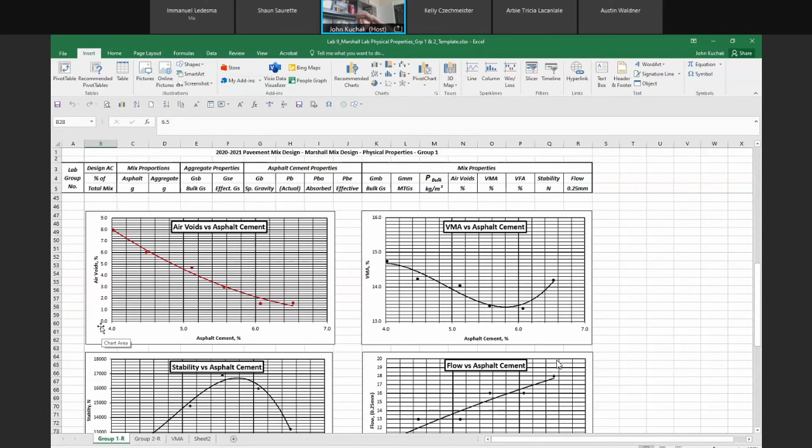These numbers are going to change now somewhat once I change these GMB and GMM. But anyways, you've got that blank spreadsheet, and that's what you're going to work off. Any questions?

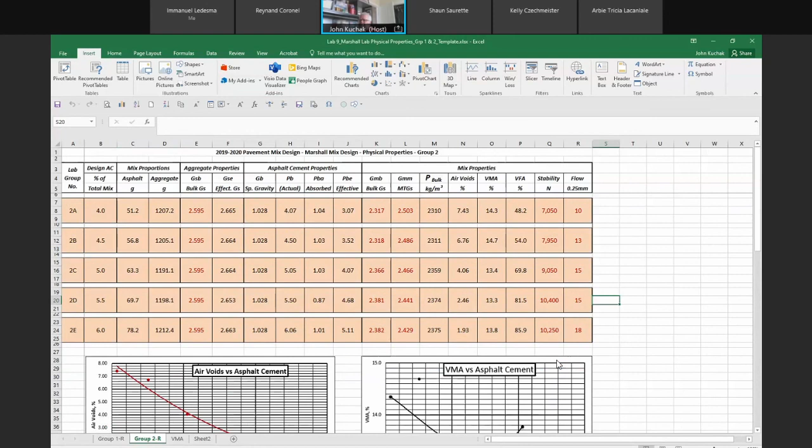Every group now is going to calculate all the properties for every AC content, like group one. If you're in group two, you use group two data. Here you can see this is group one, and I'll have one for group two. I'll give you these values, since they'll be somewhat different. Stability and flow shouldn't be any different, but since you only calculated your own, I'll put them in. There's no point going to lab 8 to dig out each one, I'll give you those. Any questions so far?

Remember, when calculating percent bitumen, it's this column because it's the actual value. It may not be exactly 4, 4.5, 5, 5.5, whatever. I'll look at these again, they may change a little bit, but the next spreadsheet will be the one you're working on for lab 9. Any questions?

Well, if there's any questions, let me know, don't wait till the last minute. Now you guys know how to design asphalt mixes, okay.